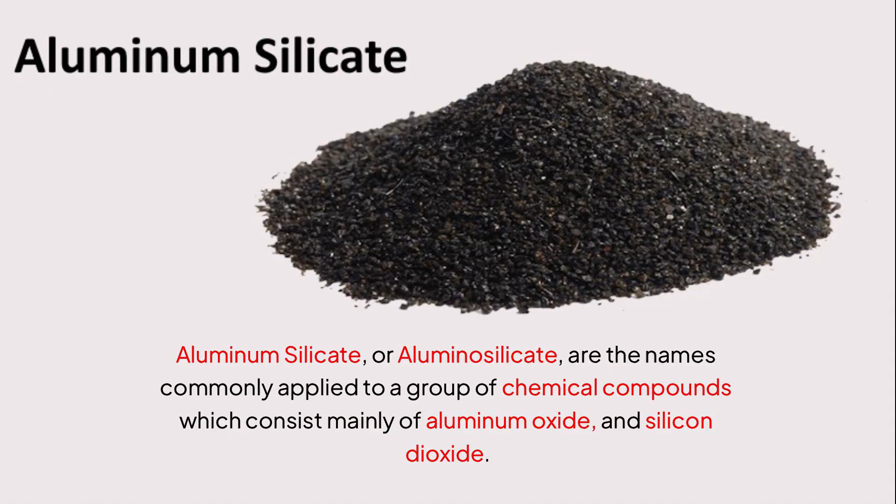Aluminum silicate, or aluminosilicate, are the names commonly applied to a group of chemical compounds which consist mainly of aluminum oxide and silicon dioxide. There are a broad number of mineral sources that generate aluminum silicate byproducts and materials, and these materials vary widely in the matrix makeup that characterize these aluminum silicate residues.

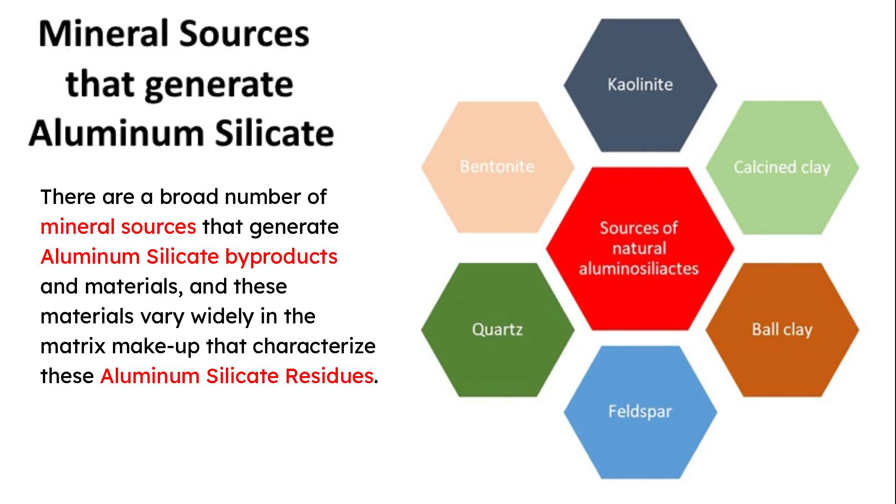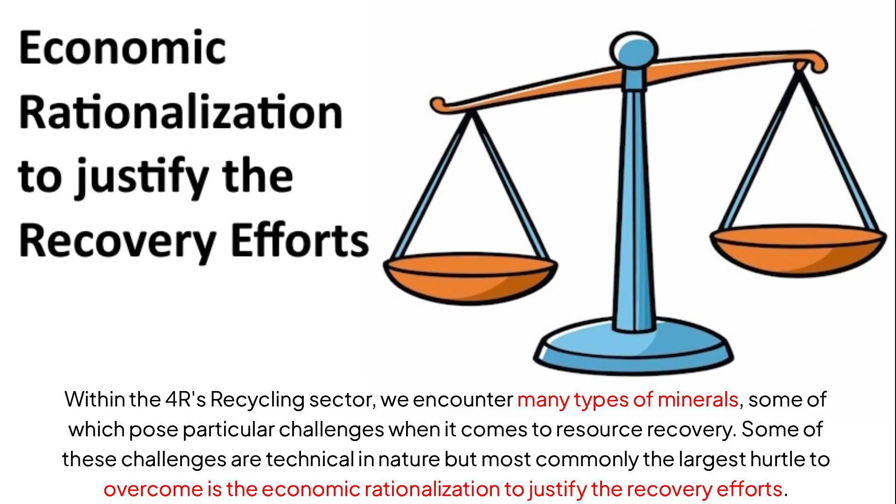In an effort to understand some of the key fundamentals that drive the waste and recycling industry, we have developed a website, waste.net, to act as a tool to assist in grasping the 4R strategy of reduce, reuse, recycle, and recover. Within the 4R's recycling sector, we encounter many types of minerals, some of which pose particular challenges when it comes to resource recovery. Some of these challenges are technical in nature, but most commonly the largest hurdle to overcome is the economic rationalization to justify the recovery efforts.

Some of the residual aluminosilicate materials that we attempt to address have been compiled into the following partial list of the most common types of residues. This list is in no particular order and only represents a small fraction of the mix of material we encounter. The types of aluminum silicate residues includes tailings wastes, red mud, gray mud, fly ash, baghouse dusts, electric arc furnace residues known as EAF dust, furnace slags, catalyst substrate scrap, ceramic and porcelain waste, refractory and abrasives recovery, spent zeolites and cryolite, mineral salts concentrates, alkali and alkaline earths waste streams, sludge, slurry, and solids residue, and filter cakes.

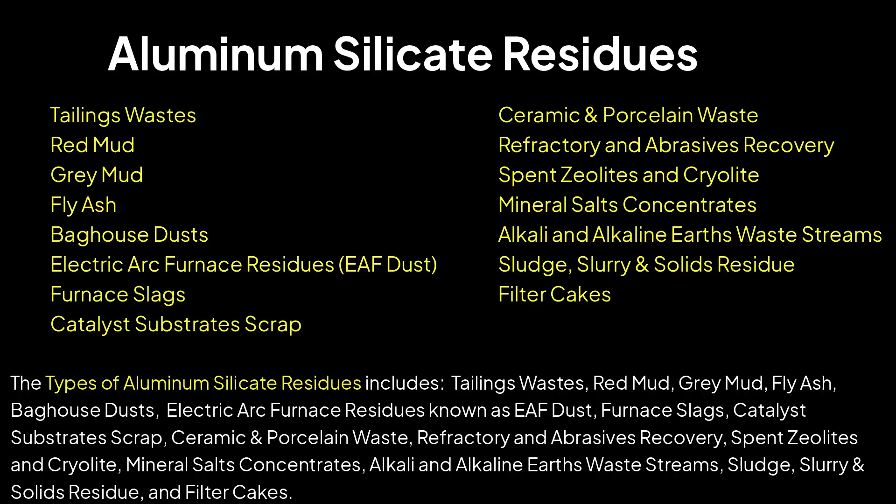We would like to focus in more detail on a few of the areas that may represent an underdeveloped opportunity in the recycling field. Mine tailings or tailings wastes are a byproduct of the metal and minerals extraction process. After the designated primary commodity of value is extracted from the ore material, the remaining waste stream is termed as tailings. Processing tailings wastes may reduce the potential of trace elements leaching, thereby reducing the environmental risk or liability, while increasing the resource recovery rate.

Red mud. Red mud is produced as a byproduct of the Bayer process in the conversion of bauxite into alumina in the preparation of the raw materials in the aluminum metal refining process. It is estimated that between 1 to 1.5 tons of red mud is generated for each metric ton of alumina produced, and 2 tons of alumina is required to produce 1 ton of refined aluminum metal.

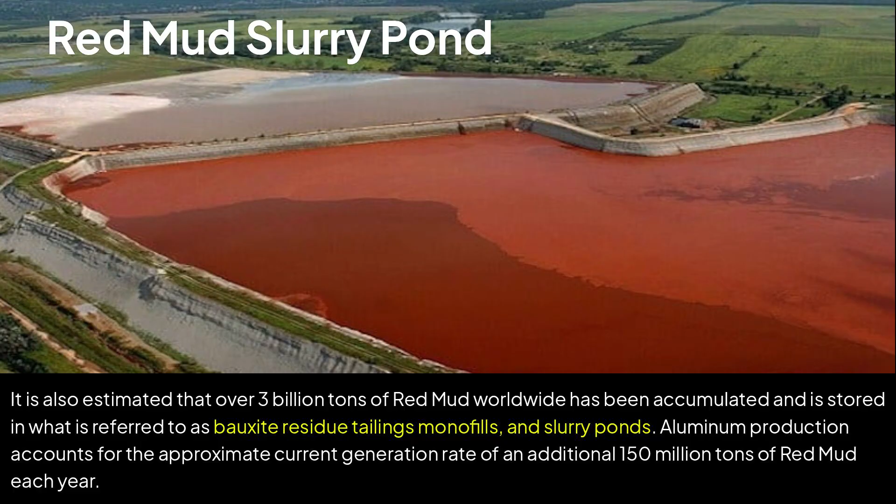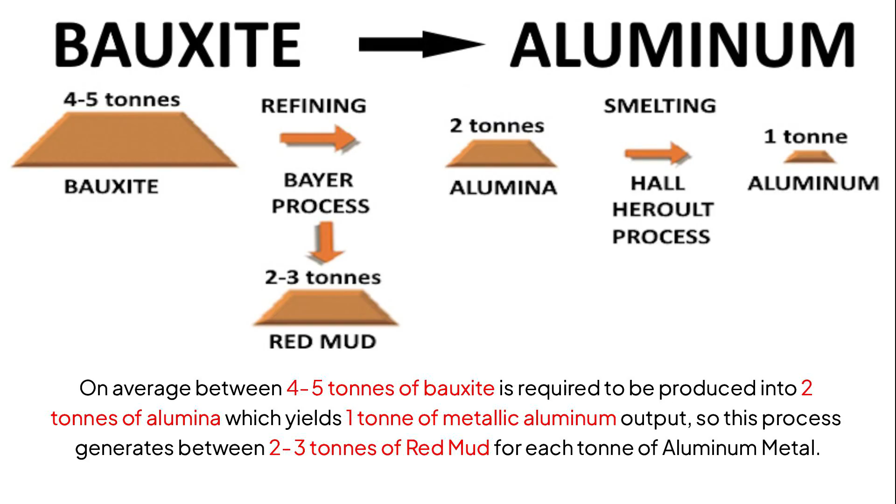It is also estimated that over 3 billion tons of red mud worldwide has been accumulated and is stored in what is referred to as bauxite residue tailings monofills and slurry ponds. Aluminum production accounts for the approximate current generation rate of an additional 150 million tons of red mud each year. On average, between 4 to 5 tons of bauxite is required to be produced into 2 tons of alumina, which yields 1 ton of metallic aluminum output, so this process generates between 2 to 3 tons of red mud for each ton of aluminum metal.

Typical red mud composition may contain a wide mix of elements, including iron oxide ranging from 5 to 60%, aluminum oxide with 5 to 30%, silicon dioxide with 3 to 50%, and it also may contain a combination of less dominant items such as titanium dioxide, calcium oxide, and sodium oxide. Some red muds may contain other trace elements, such as mixed heavy metals ranging from 0.5 to 13.0%.

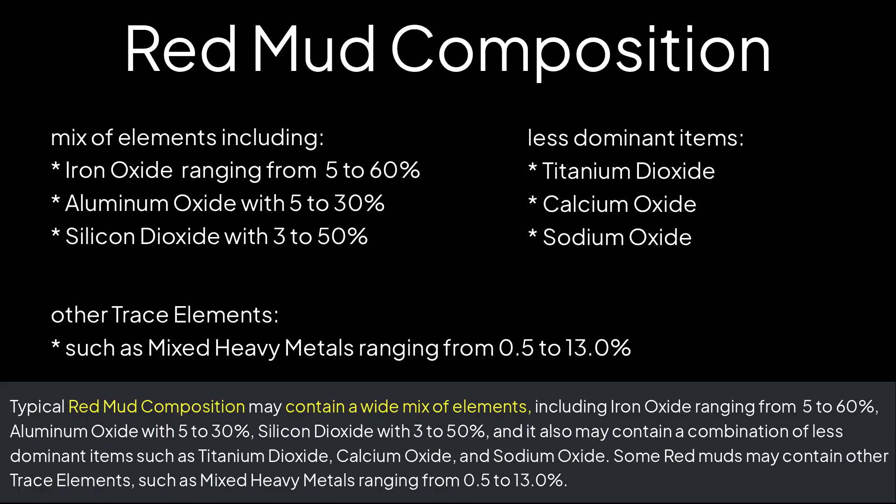Fly ash. Fly ash may be viewed as a type of aluminum silicate residue. There are a variety of types of ash, including coal ash and incinerator ash. Incinerator ashes are typically designated into incinerator bottom ash, IBA, and flue gas stack fly ash. These ashes may be further classified into Class F fly ash and Class C fly ash. Class C fly ash generally contains more than 20% lime or calcium oxide, and Class F fly ash contains a lower lime or calcium content.

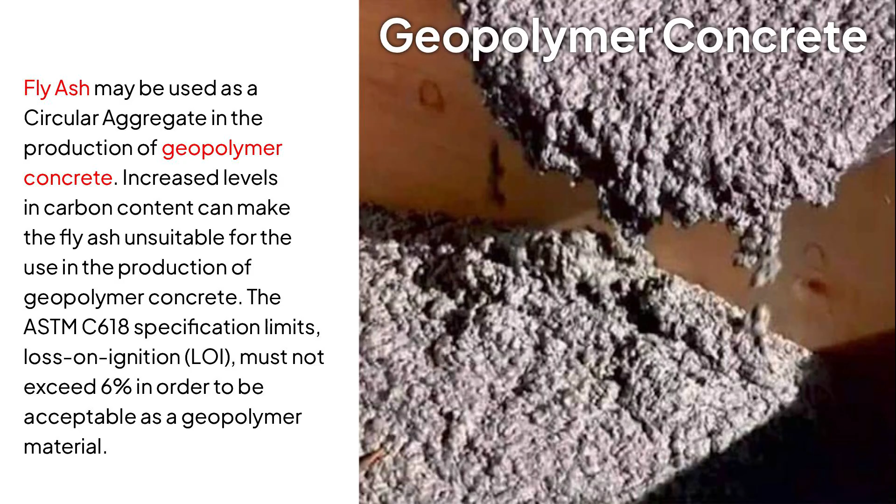Fly ash may be used as a circular aggregate in the production of geopolymer concrete. Increased levels in carbon content can make the fly ash unsuitable for the use in the production of geopolymer concrete. The ASTM C618 specification limits loss on ignition, LOI, must not exceed 6% in order to be acceptable as a geopolymer material. The chemical composition of fly ash depends upon the type of combustion fuel used, and the methods used in the combustion process.

A typical average chemical composition of fly ash may contain major elements such as SiO2 or silicon dioxide, ranging from 55 to 65%, and aluminum oxide known as Al2O3, with a content of 25 to 35%. The balance of the content consists of a fringe mix of iron and iron oxides, and other oxides, such as calcium, magnesium, manganese, potassium, titanium, and sodium. Trace heavy metals may range from 0.1 up to 8.5%.

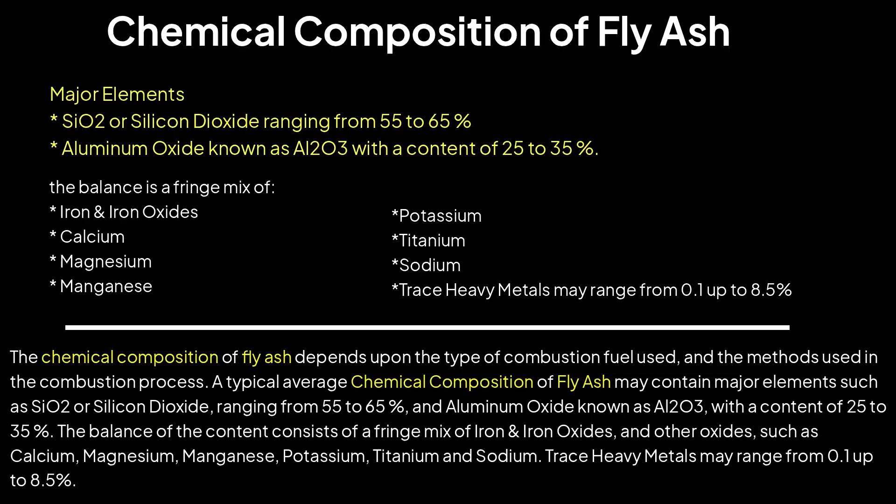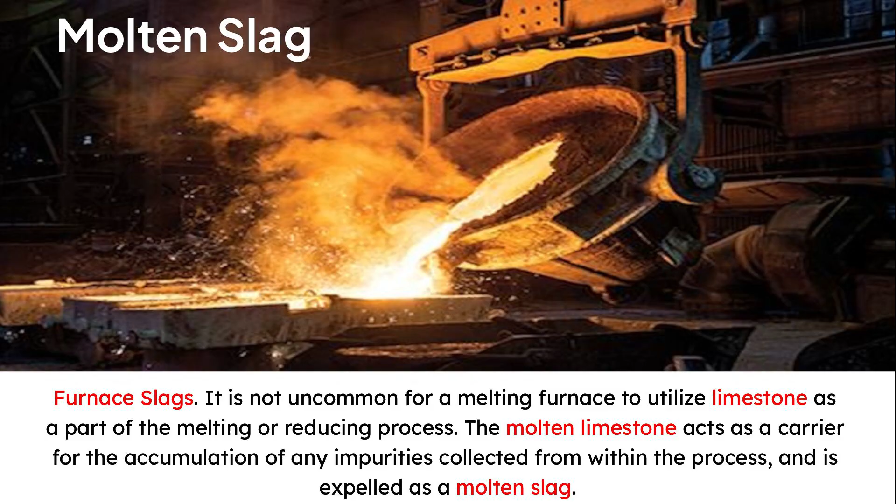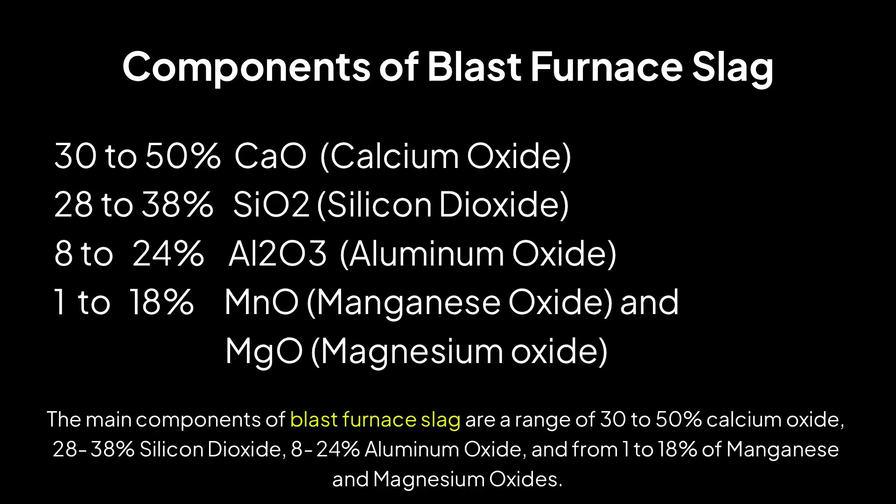Furnace slags. It is not uncommon for a melting furnace to utilize limestone as a part of the melting or reducing process. The molten limestone acts as a carrier for the accumulation of any impurities collected from within the process, and is expelled as a molten slag. The main components of blast furnace slag are a range of 30 to 50% calcium oxide, 28 to 38% silicon dioxide, 8 to 24% aluminum oxide, and from 1 to 18% of manganese and magnesium oxides. Trace elements and mixed heavy metals may total 0.3 to 9.0%.

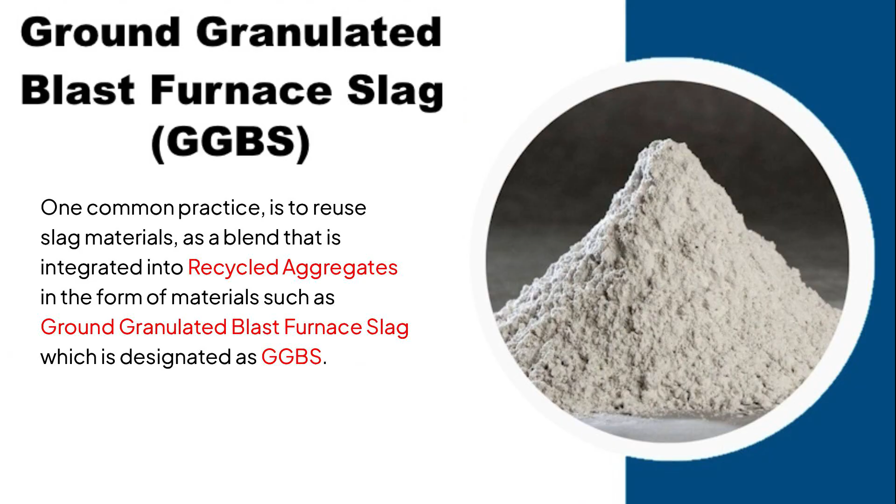These slags are typically grouped into a classification included as aluminum silicates residues. One common practice is to reuse slag materials as a blend that is integrated into recycled aggregates in the form of materials such as ground granulated blast furnace slag, which is designated as GGBS.

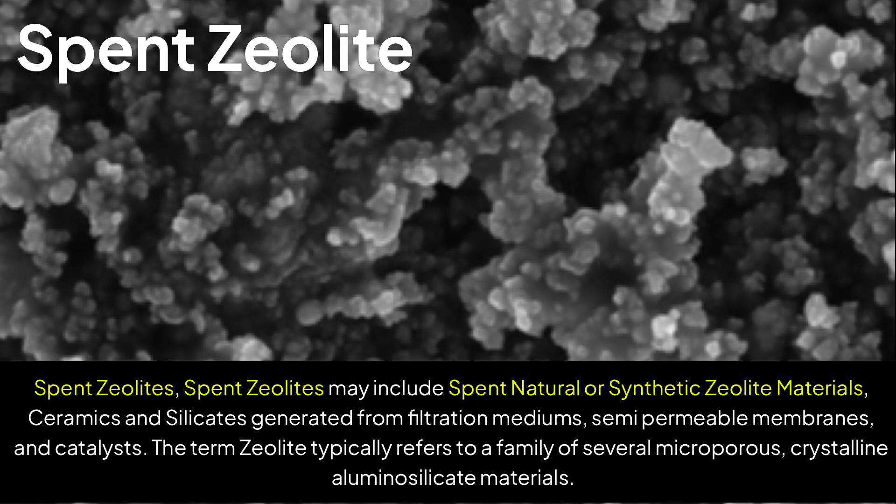Spent zeolites. Spent zeolites may include spent natural or synthetic zeolite materials, ceramics and silicates generated from filtration mediums, semi-permeable membranes, and catalysts. The term zeolite typically refers to a family of several microporous, crystalline aluminosilicate materials. One wide common use of zeolite materials is as an ionic exchange resin utilized in common water softeners. Recovered zeolites may be beneficial in the efforts to decarbonize the energy infrastructure.

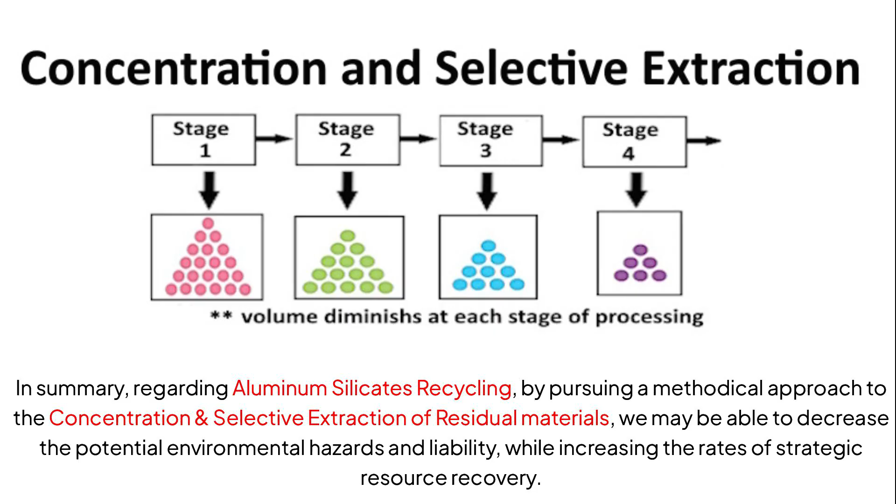In summary, regarding aluminum silicates recycling, by pursuing a methodical approach to the concentration and selective extraction of residual materials, we may be able to decrease the potential environmental hazards and liability, while increasing the rates of strategic resource recovery. We intend to explore the recovery of other types of minerals, metals and materials at some point in the future.